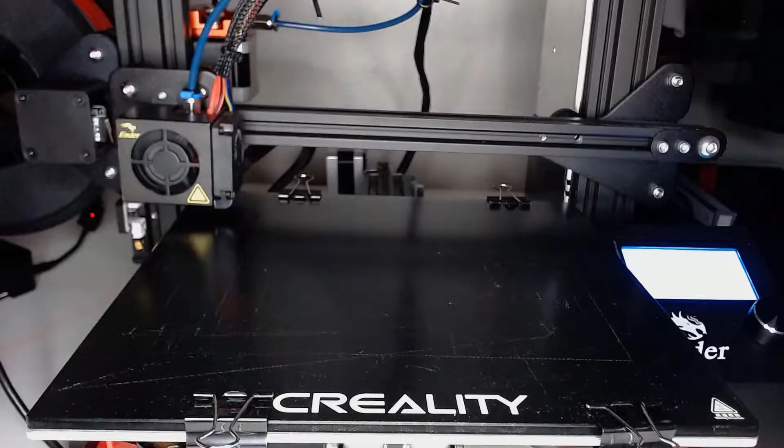I haven't really noticed that this has been an issue since last fall. The issue was after the first summer where I was working on a lot of these projects that you've seen on this channel and through my portfolio, is I had a lot of time during COVID to work on these. So now my issue is I have a lot of ideas and I've started a lot of things. I'm having issues with the last 10% to finish them out. I think this is common for a lot of people, and I'm really curious as to why, and I kind of want to talk about that at the end of this video.

Specifically, I want to talk about 3 different projects that I started and got really far into, but just didn't finish them. I think there's a couple of good reasons for that. The projects I want to talk about today are the self-watering plant, the self-balancing robot, and the LED strips that are going to go to desk tables that we made.

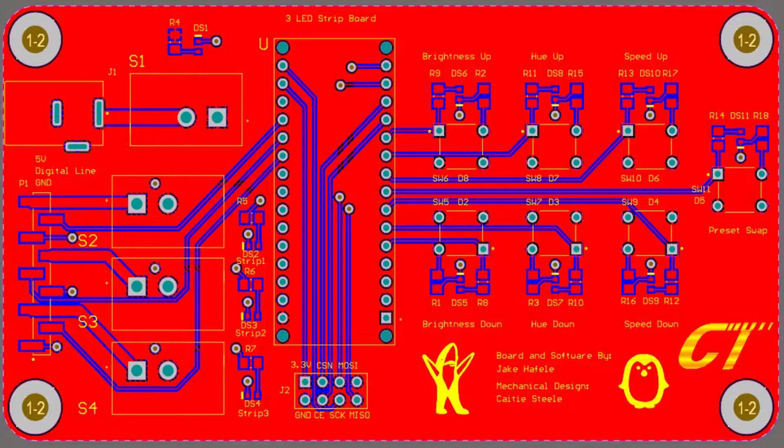Each of these projects kind of have a gimmick to them or something that I really wanted to hone in on. I think the reason why I never finished them was because I hit a roadblock and I either got too busy or distracted. But a lot of these projects, a lot of the main takeaways of planning the project, putting it together, designing a PCB for it or a circuit or some code, all of that was there. Whenever I hit a roadblock at the last 10%, I really struggled to get over it, especially when I was busy with a lot of other stuff going on.

And you know, that's perfectly okay. Some ideas aren't going to pan out, but it's really tough when I see them sitting in a box over at the corner by my desk and they're just sitting there. It's even worse because I want to start 10 more projects right now and I just don't have time to even finish the ones that are backlogged for a year.

So I kind of want to talk about each of these projects and show them off because there's a lot of cool ideas in there, a lot of cool stuff. I don't know if they're going to get finished. They might each get their own individual video at some point, or maybe I'll just remake them from what I learned. But the first project I want to talk about is the self-balancing robot.

The self-balancing robot was something that I wanted to put together to learn more about driving stepper motors with Arduino. I got a lot of different Arduino modules kind of based on what I did last summer before I was too familiar with PCB design. I think one big pitfall of this project was that I had it all set up on a giant breadboard. If I started this project right now, I would 100% design a PCB for this and make it a lot more efficient.

I think that was problem number 1. It also used 12 AA batteries to power it, and I think that was pretty inefficient too. If I felt more confident using LiPo batteries, I think that would have been a much more efficient route. I also think I just got too over my head with the size of the robot because I saw a lot of videos on it, and I saw some videos where the robots were larger, but I think these robots where they self-balance on 2 wheels benefit a lot from being very small.

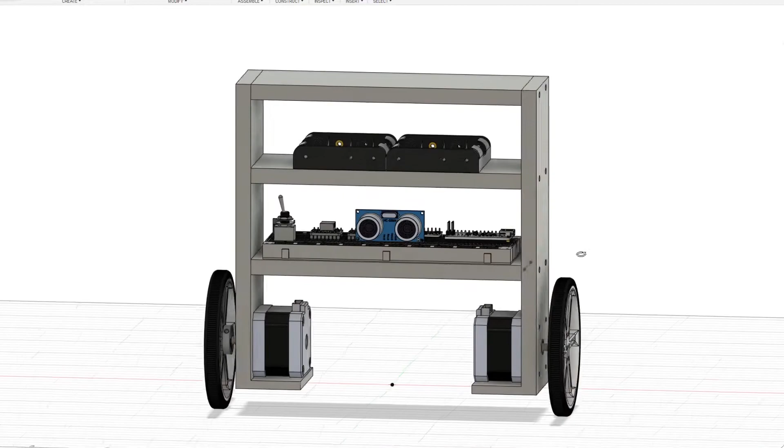So when they use the PID control in the Arduino code, or however you program it, a lot of these projects use Arduino just to get people into it, it'd be a lot easier to balance with the weight. So you're probably looking at the CAD model right now beside me, but I designed the whole thing, I printed the whole thing, I put together the whole circuit. Where I got jammed up on the first part of the project was when I was driving the stepper motors.

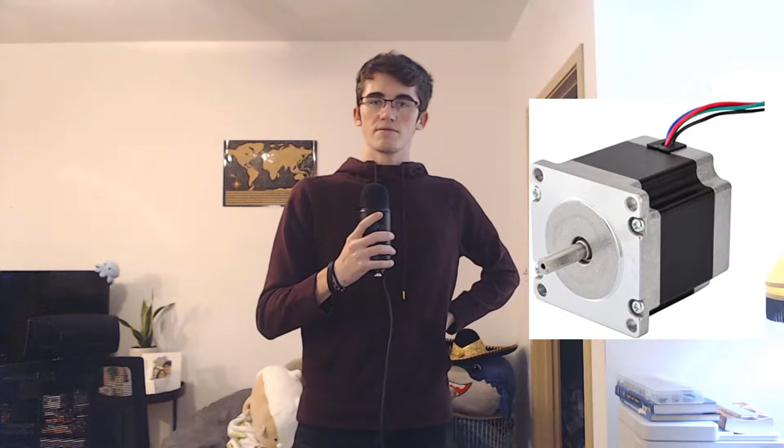I couldn't get the wiring or the code figured out, and I feel like it was an issue with my power supply, or just not giving them enough current draw. They were 2 NEMA 17 stepper motors, very similar to what I have in my 3D printer. I want to learn more about those and do more with them, but applying them to a self-balancing robot as my first project wasn't very efficient. I think if I did something more like a 4-wheeled thing, similar to the spider robot but with wheels, that could have been a lot easier to implement and learn from.

But I still learned a lot from this. I still really enjoyed it. I think the concept is really fun. This is something I could go back to and either pick up from what I have based on the CAD model, or rework it.

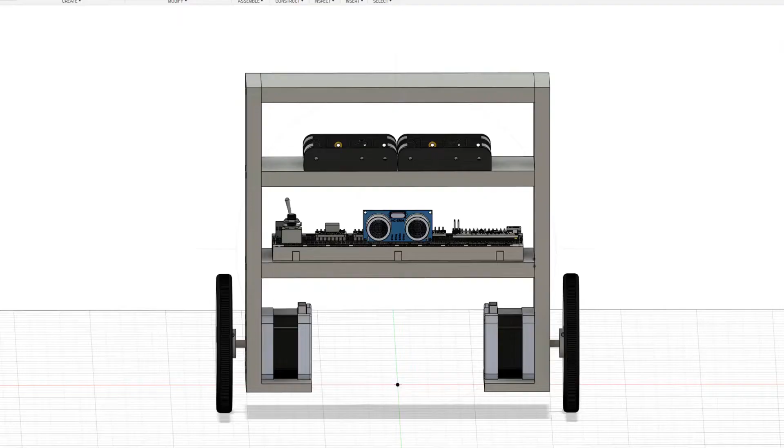But there were a couple pitfalls in this one, and out of the 3 projects I'm going to talk about today, this is the one least likely to get finished, and I started it at the very beginning of the year. So when this project started to fall through, I changed focus to another project, the self-watering plant. I designed a box basically to house all the electronics.

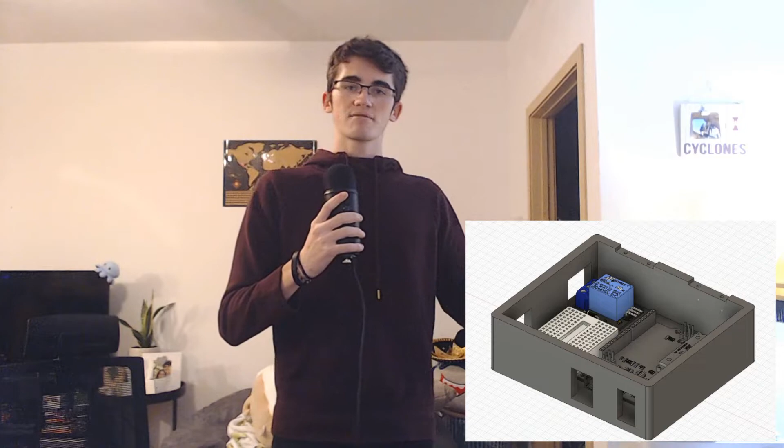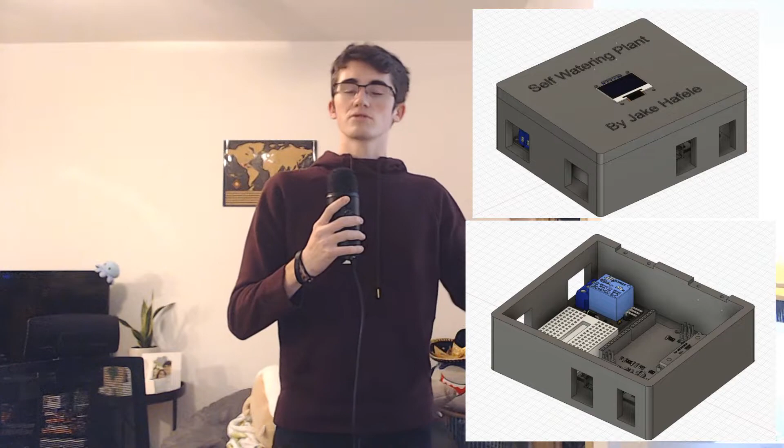This was last fall, right when I was starting to learn PCB design through SolarCar. I wasn't very familiar with it, so it was on a breadboard. But unlike my previous project, this only had an Arduino and a little LCD module on top to display information about the plant based on analog moisture sensors I was going to put inside the pot, to read data and then use a little motor with a valve to water it every day.

Now my pitfall for this was I've never taken care of a plant in my life, and I didn't want to kill one of my friend's plants, so I didn't do it. I got really busy, and I have the whole thing printed, everything screwed together and put on it. It's literally just a matter of getting the correct data on the analog sensor for the plant.

I was a little hesitant to do this because I was worried the analog data coming from the moisture sensor would not be very consistent, leading to overwatering the plant or killing it. I could check if it wasn't watering at all, because I could easily keep track of something on the Arduino. If I went back on this, I would have had some kind of fail-safe to check - maybe if it hasn't watered it 1 or 2 times a day, water it at noon and 5 o'clock or something like that.

I plan on putting it in the windowsill and doing all that, and I have the tubing and the case for the water, I just never set it up. I did 3D print a part for the moisture sensor, like one of those little wooden stakes you put into plants for tags. I printed a part for that, and was going to put the moisture sensor on it and have that go out to the box.

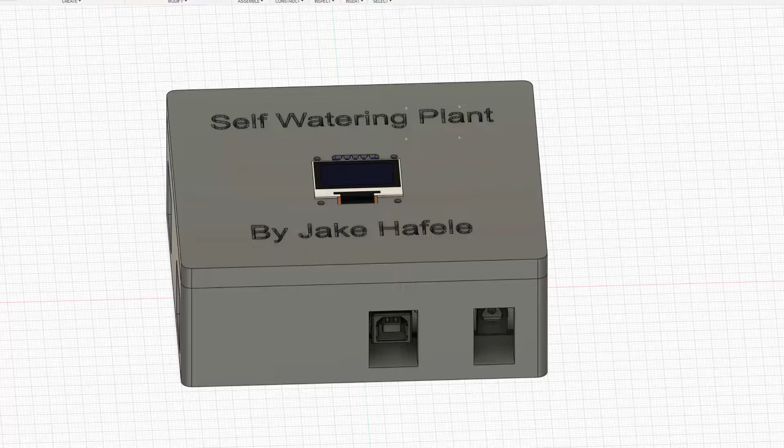The box would tell you information like the time of day, how many times it's been watered, what the current moisture is. I might have had temperature on there too, on top of the plant, just to see sunlight, I don't know - that doesn't really make much sense, so it's just an idea.

This project was never fully realized. The code was very straightforward - if the analog value from the moisture sensor dips below a certain point, add some water, wait a bit, if it goes back up, you're golden. Like I said, I just didn't want to kill a plant, but this is something I could very easily throw together in one day in the summer.

That's another trend you'll see in this video: they always push stuff back, saying, oh, I'll have time in the future. I even said that about this video. I've been trying to record it for about a week and kept putting it off because of classes, but anyway, you'll see that same trend in my third project too.

So the third project is basically a PCB remote control for LED strips, funded through Critical Thinkers, one of the clubs I'm in.

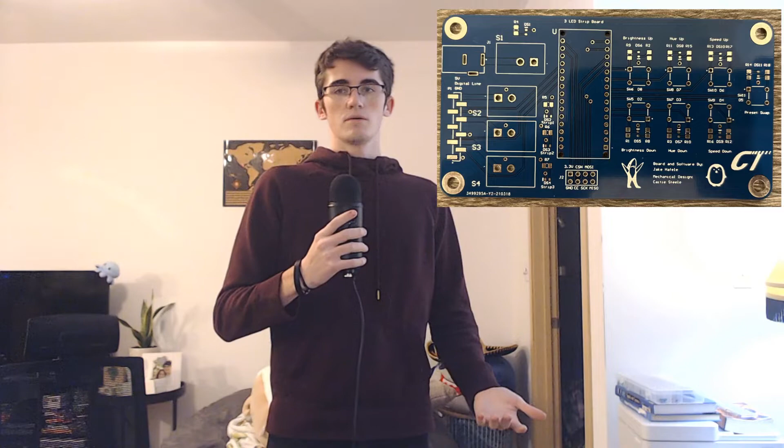My girlfriend and I wanted new side tables, so we went to Menards, built them, painted them, and stained them. They're great, I still use them, they're in the bedroom right there. I'm a big fan of those.

We bought one of those mounted power supply blocks you see in tables now, where you can plug directly into it. One of those plugs is going to be used to power a PCB I designed that hooks into LED strips.

I think my fatal flaw with designing the PCB was never really thinking about connectors. I just used pin headers, but for something sitting on a desk, I think I needed a more secure connector, kind of like a MegaFit or MiniFit connector, instead of male-to-female pin headers, because they would pull out really easily with the LED strips.

After doing Solar Car last summer and spring, I looked back at this board and thought maybe I could redo the PCB, but then I'd have to ask for funding again since I already had the first board. That deterred me a bit, so I was thinking we could just wrap the project as is, since it is finished.

For the LED strips I controlled, I reused a lot of code from my first 3D printed project that had different LED strips and was sound sensitive. It was pretty easy to use with an Arduino library, very straightforward, but fun to do.

One thing I should have done is change how the buttons worked so they weren't just wired to digital pins, because they would always scan for inputs, and that would slow down the LEDs a lot. This was a big mistake, something I could look into changing in the future.

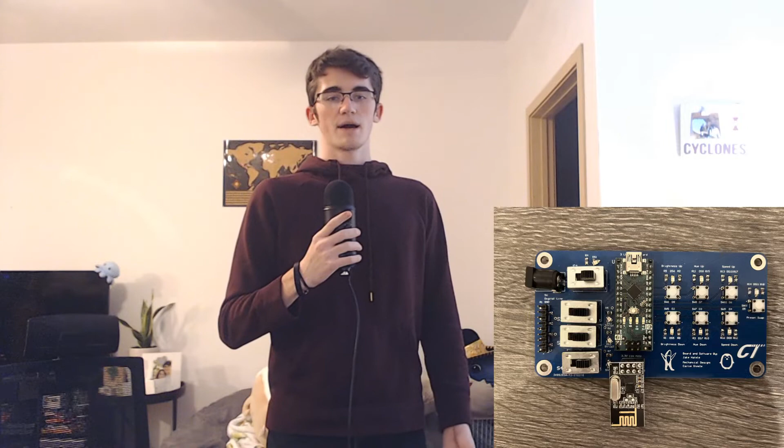The issue is it would need a different PCB. So if I came back to redo this project, I'd really lay out what I want to do on the PCB first and maybe demo the code earlier. Normally that's different because I'm working on a breadboard for these projects, so if something's wired wrong I can just swap it around - I'd order stuff early so I had the chance to play with it in code later.

Maybe I should have flipped it around for this project, especially because the club was paying for it, so I wasn't really biting the bullet there.

Either way, the LEDs were still really cool, and I think the patterns I got to work on them were still really interesting. I might have a video of that here, not sure if I recorded any of it before. But the board itself is pretty fun, and I'm pretty happy with how the layout went, especially since I did it last spring.

This was before I did a ton of layout in Solar Car, but I've definitely gained more layout experience in Solar Car now, so throwing together these Arduino boards isn't too bad after you've done a 4-layer board.

So those are the three projects I've been hoping to get done, but they're very much on the back burner. I'm in a really weird spot now because I want to start new projects and get funding for new things and new ideas, but I don't have a lot of time.

This is something that's been compounding on me through the semester because I got in over my head with how much time I'd have versus my clubs, versus school, versus personal projects. I'm having to pick between them, and that's expected in college, but it still sucks because I really want to make stuff and go back to that summer where I had time to make stuff.